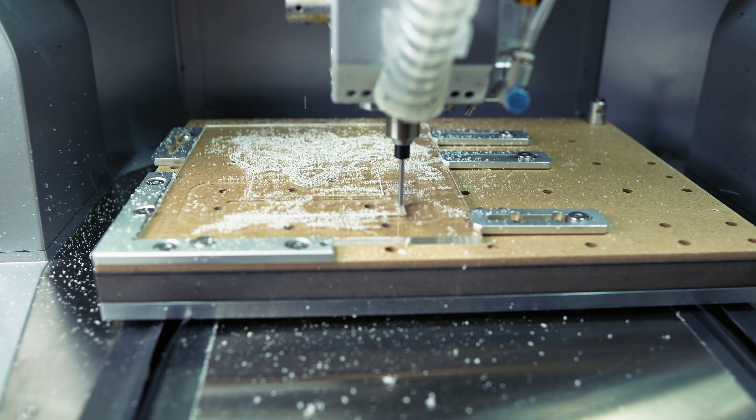Can a 3D printer create the same products as a CNC router, and is the quality just as good? My name is Mick. We're about to find out on the 3D Printing Zone.

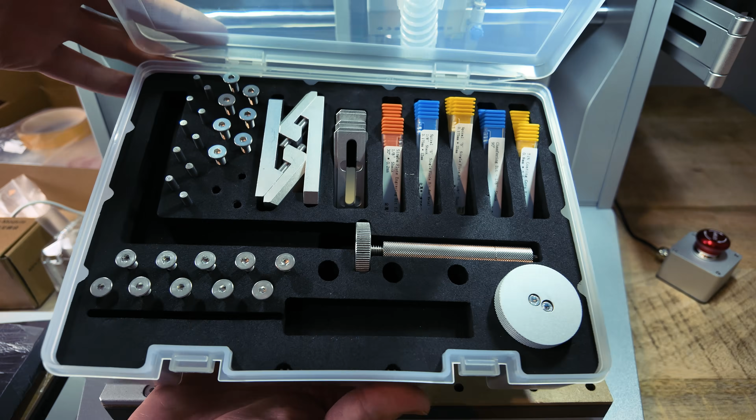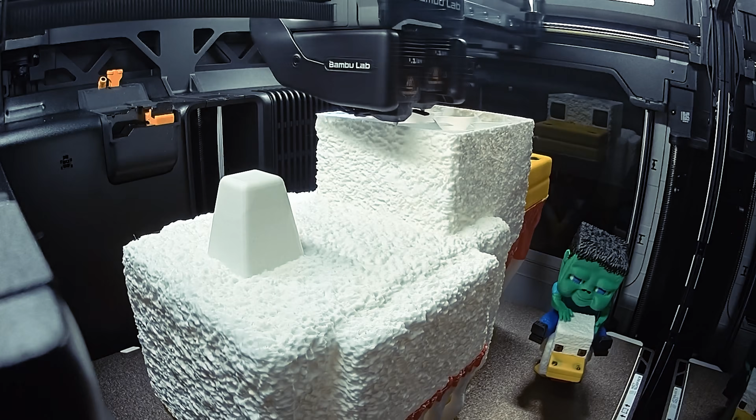I've been 3D printing since 2017 and have owned over 40 different printers. I just received my first CNC router, the Carvera Air from the company Makera. I've never used a CNC router before. In fact, it's kind of intimidating. It comes with a ton of drill bits and all these other parts that I don't really know what they do yet. That being said, a 3D printer and a CNC router use similar G code, and they both have an X, Y, and Z axis. So you think it would be similar, right?

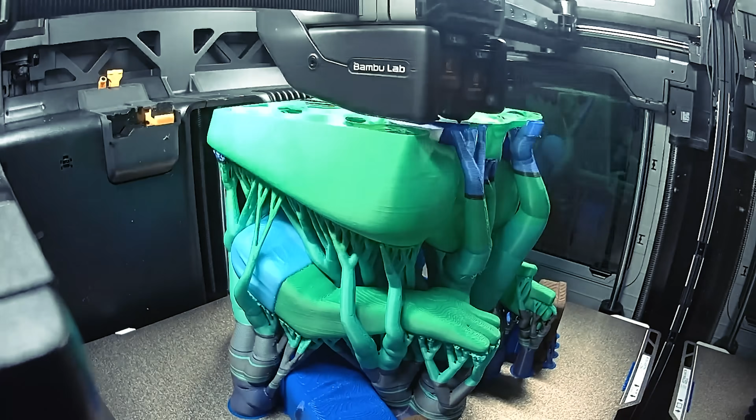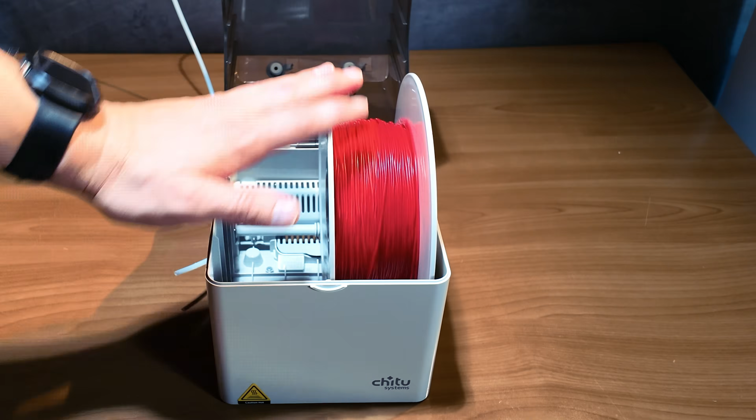Well, a 3D printer is additive, meaning it's adding to or building layer upon layer to create a part. A CNC router is the opposite. It is subtractive, where it is carving and subtracting material layer by layer. 3D printing is limited to the materials it can print, mainly different types of plastic, where a CNC router can carve plastic, metal, and a bunch of other materials. Let's get this thing unboxed, opened up, check out what it comes with, and try making something.

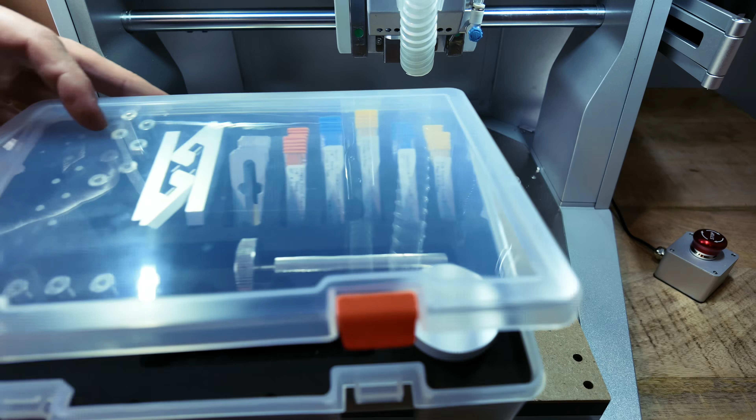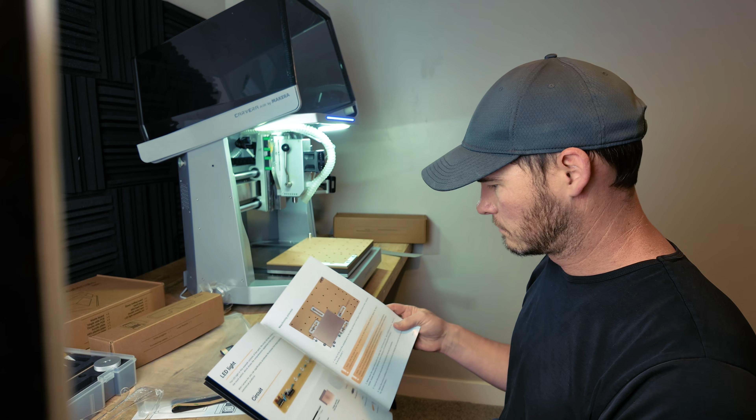Like I mentioned, this thing was intimidating at first. It comes with a ton of drill bits, other things I don't even know what their purpose is yet, and it even comes with a laser engraver. Despite being intimidated by the machine, once I opened the instructions, it gave me a clear view of what I needed to do from start to finish. Let's try making a light on the Carvera Air, then we'll try printing a similar light on a 3D printer and see how they compare.

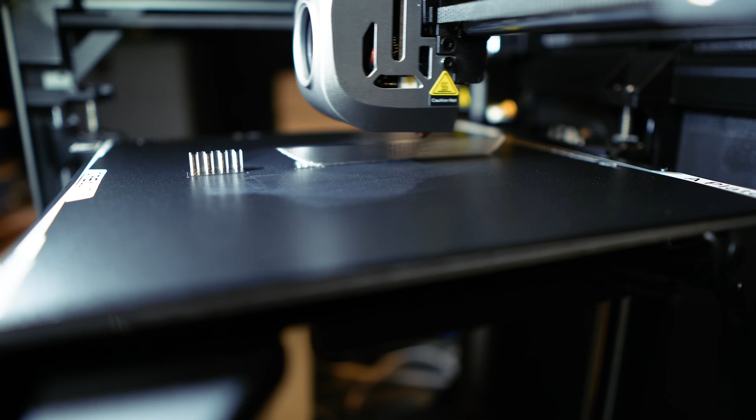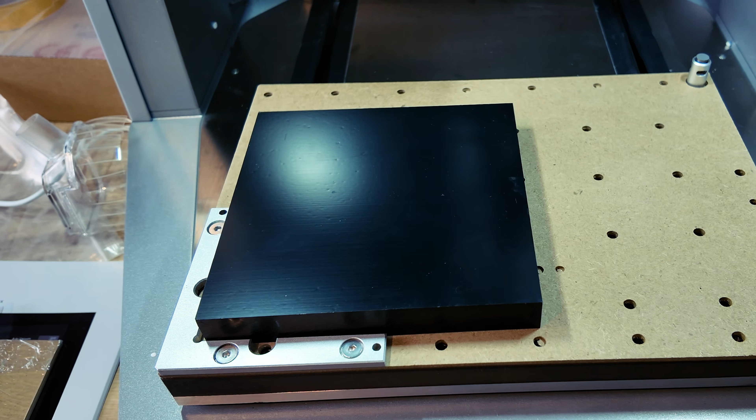I chose to use this light because it features clear acrylic, black acrylic, metal. It has a bunch of different materials so we can see how they all work together to build one piece. We'll start with this black acrylic block. And I keep saying acrylic, I think it actually might be ABS, but it's a very hard plastic. Unlike a 3D printer where it's additive and it's building layer by layer like we talked about before, this will be carving out the part, which means it needs to be stuck to the bed.

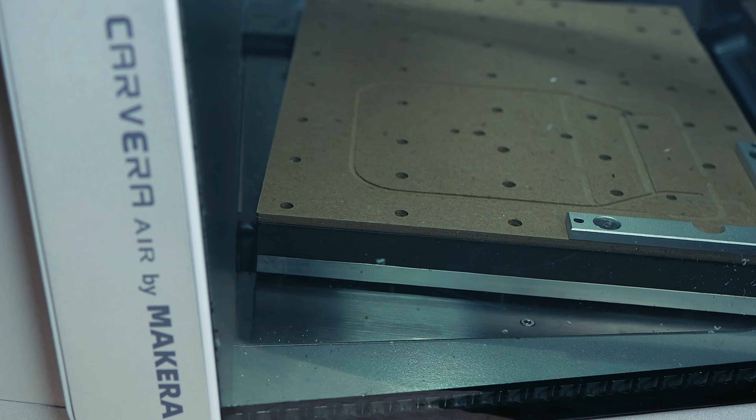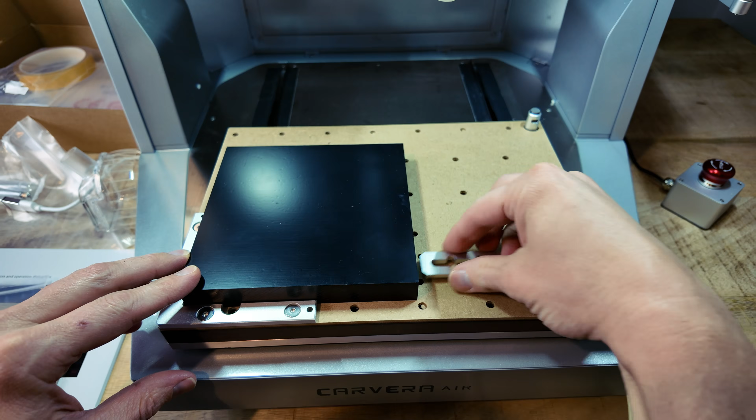There's a couple different ways you can do this. Some people will do the tape method where they put double-sided tape on the bottom. Others will do a tape method with the brackets. Today, I'm just doing the brackets where you put them on, you screw them tight, and that part will not move. Before the CNC router begins carving, it needs to level the bed. That's what we call it in 3D printing. It's really building out a mesh to see where the part is at and make sure it's level. To do this, it uses the laser on the right side.

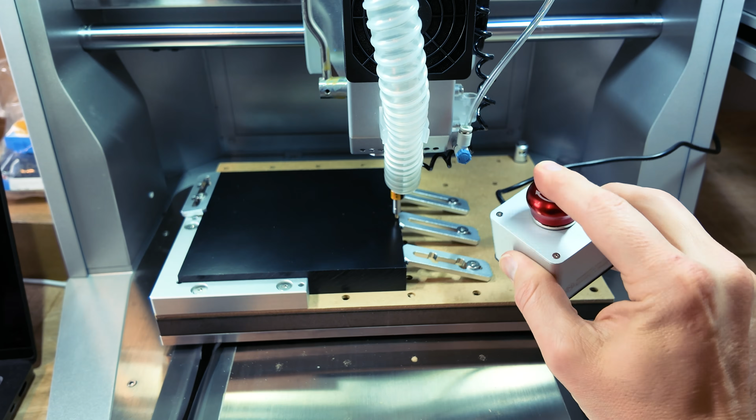Now, I almost broke the laser. When I put this in the software and I said, carve out the base for this light, I messed up, I didn't have the parameters right, and the laser almost hit this metal bracket. Luckily, it comes with an emergency stop switch. I hit that right before the laser broke, hitting that bracket, and we saved the laser sensor. This isn't the laser that engraves, it's the laser sensor that can detect how close it is to the bottom or to the part.

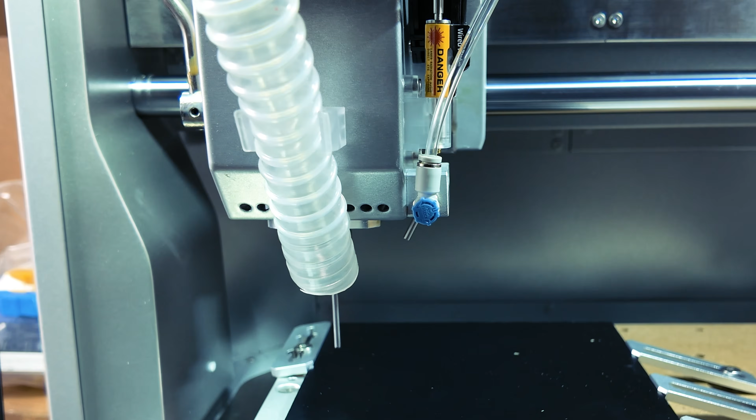This CNC router comes with a hose that can help suck up material as it's carving. I didn't hook up my shop vacuum or anything to the back. It would be nice if it had something included, and I believe they have other models that have an included vacuum. But for the purpose of this video, I left that vacuum off so that you can have a better view of what's actually being carved.

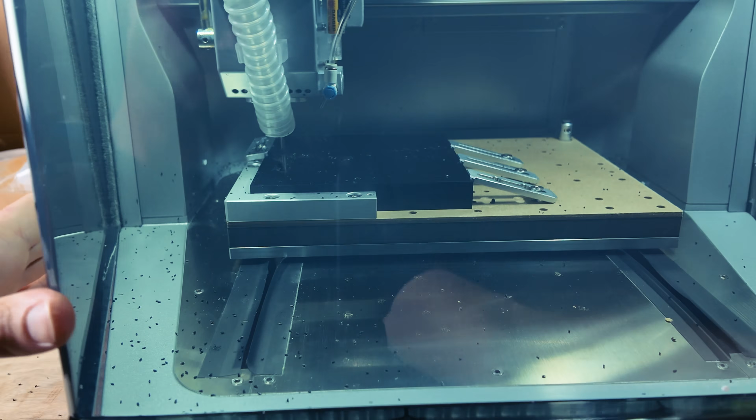When this thing started carving this black material, it started to make a mess. I had to close the front. Luckily, closing that contained all that material inside of the chamber. The G code for this file was already sent to us, so I haven't made any changes to it. When it's doing that last line of carving and cutting, it leaves these little tabs that you need to cut off at the very end.

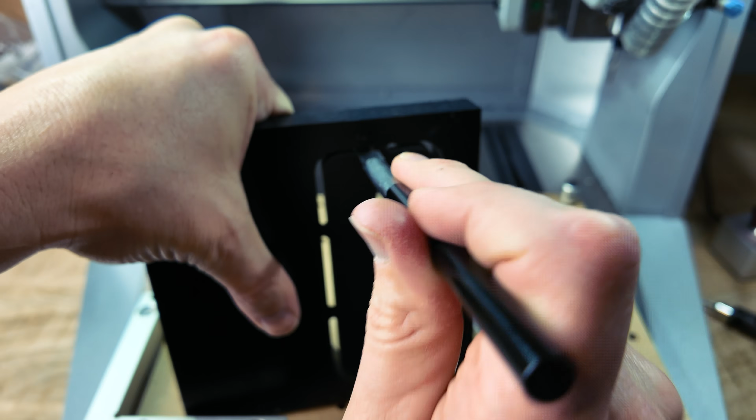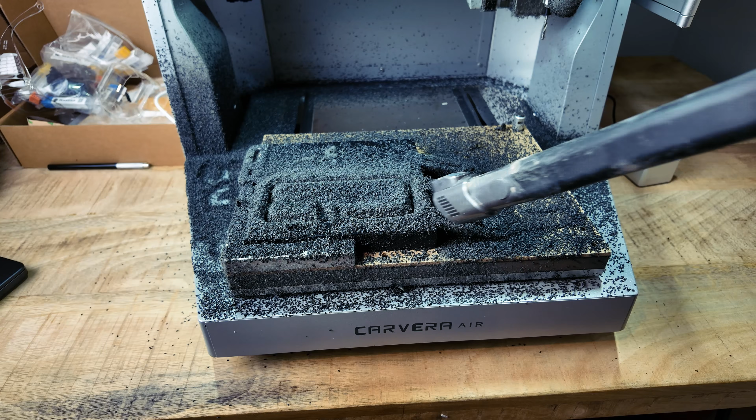Having those tabs there secures the part so that it's not moving around when it's trying to cut that last edge, and it's just a little small detail that you just clean up with the blade that they include. Once the part was finished, I opened this up and was able to vacuum everything out. It was actually kind of satisfying vacuuming up this material.

It had like a static feel where it was sticking to everything, so I really had to vacuum the whole chamber. The only area where material left the chamber was the two slots where the bed moves forward and backward. I don't know if you could really get around that. They have these rubber covers, but besides that, stuff's just gonna fall through there and it's not that hard to clean up.

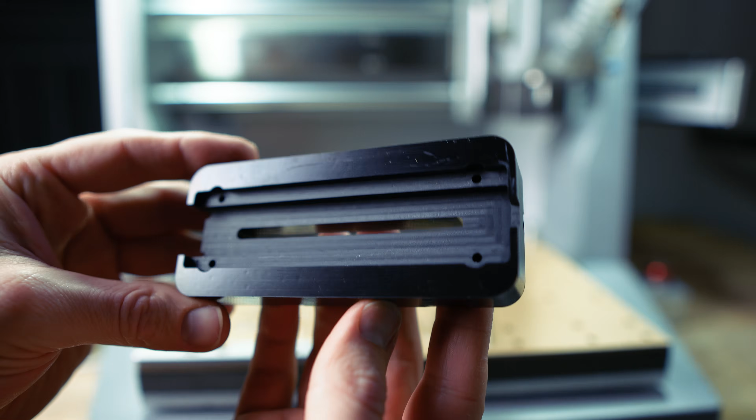This black base came out looking very clean. Let's see if it will fit the LED PCB board that came with the Carvera Air. That fits perfect. Let's move over to the aluminum piece. Just like the black base, I will secure this down with those same brackets.

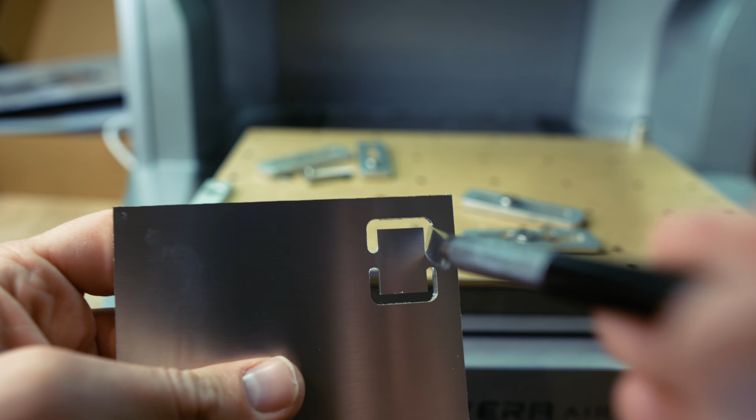I tried using the included blade to cut the aluminum part, but it was really difficult. Luckily, I have a battery-powered Dremel and it made it so much easier. I forgot to hit the record button when I cut this out of the bigger piece, but here's a clip of me just cleaning it up. By the way, don't do what I did. Make sure you have gloves or you're holding that with pliers. This could have easily slipped and cut me, and I already have so many cuts on my fingers.

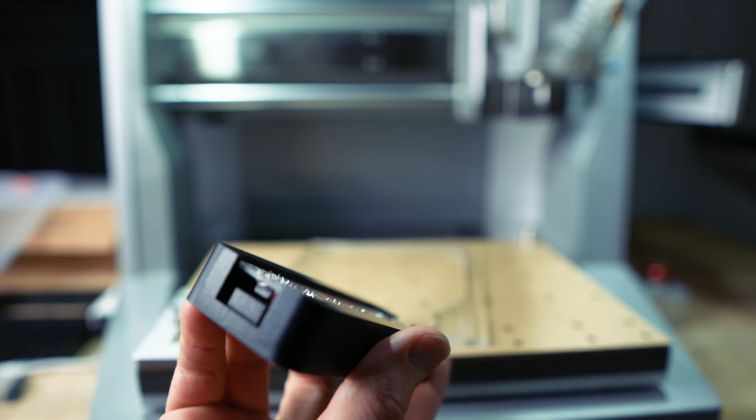You might be wondering, what is this aluminum piece for? Well, it goes right here on the bottom of the base, and it makes contact with the PCB board so that when I want to turn the light on or turn the light off, all I have to do is touch it with my finger. Touching it and holding down will dim it. Touching it again and holding it will make it go brighter. And then just touching it once will turn it on and off.

I didn't design this, I didn't code anything. This was already sent with the CNC router, but imagine the possibilities. This thing can also do PCB boards. I didn't do that today, but being able to do a PCB board, plastic, metal, all these different parts together in one piece, that is really impressive, and I don't think you could do that with a 3D printer. Now let's move to the clear acrylic and cut out that Spider-Man.

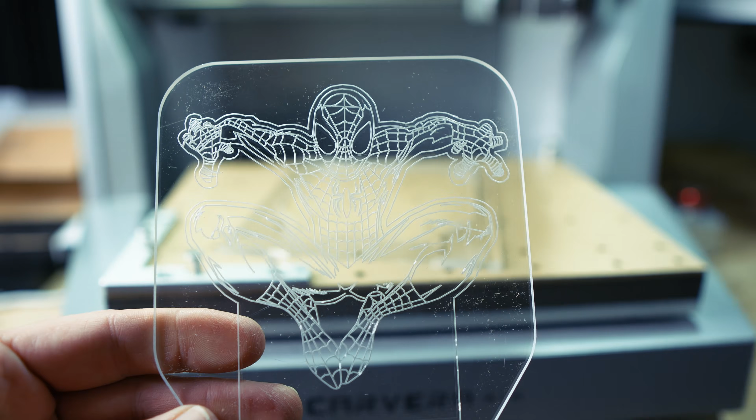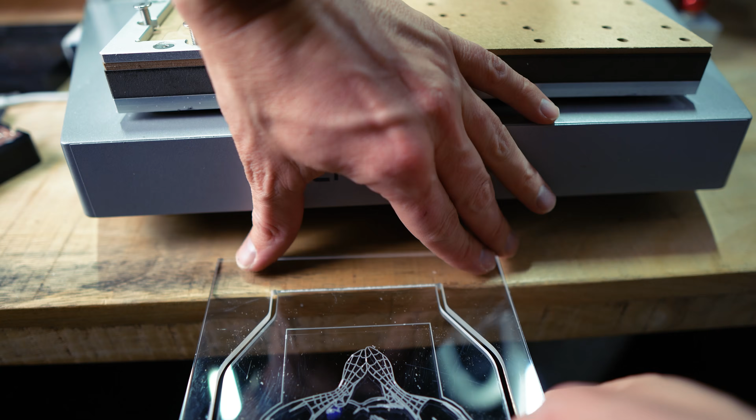This came out looking so good. It really looks like something you could buy on Etsy where you're getting a custom family image made. The nice thing about this part is I don't need to cut anything at all. Those little tabs don't exist. All I need to do is push this lightly to break it off. Okay, maybe not lightly. I had to push pretty hard, but it came out looking really great. Let's add it to the base and see how it looks all together with the light on.

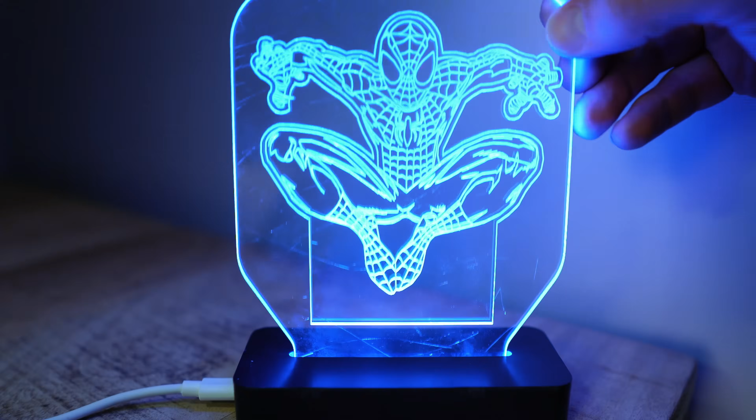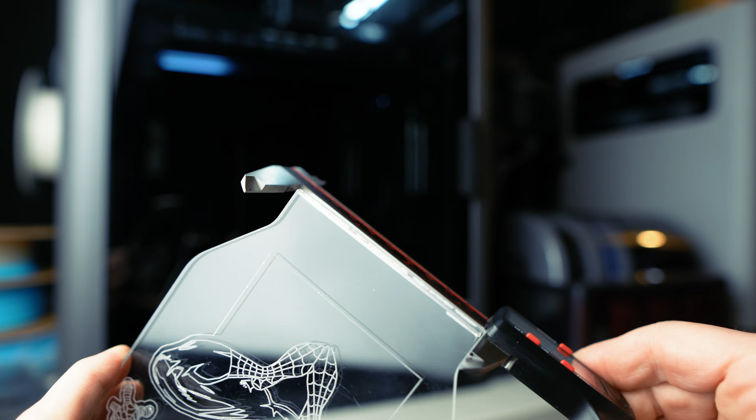This really looks so good. I love it, and it's just amazing that I was able to create this with one machine. Now the big question, can we recreate this clear piece on a 3D printer and have it look just as good? Let's go give it a try. The first thing I'll do is take some measurements. I want to make this as close to the same shape and size as the clear piece that we just cut on the Carvera Air.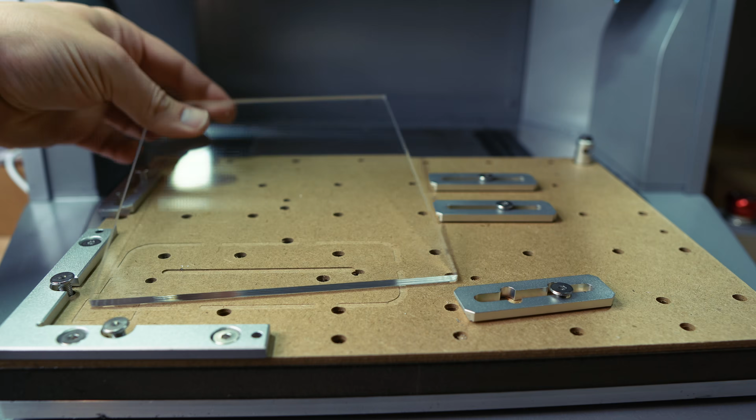I couldn't find the same exact spider design, so we're going to use this one instead. All right, let's send it to the printer. I'll be using this clear PLA to see if it can be as clear or close to as clear as the clear acrylic. This first layer came out looking really good. It pretty much looks like it's see-through or black actually, because it's just showing the color of the bed.

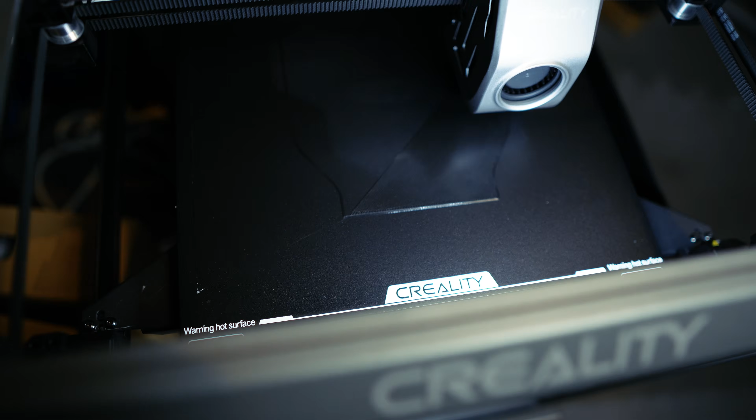While that's printing, everything I've made so far on the Carvera Air has been templates that they've created. What if I want to create my own model or create something that's unique to me, not something that they sent? Again, this is very intimidating.

I've never done anything like this before. That being said, they have tutorials for everything, including left clicking on the mouse, right clicking, how to navigate, how to rotate. Let's open up their software and I'll show you what I did to create this cool looking dragon.

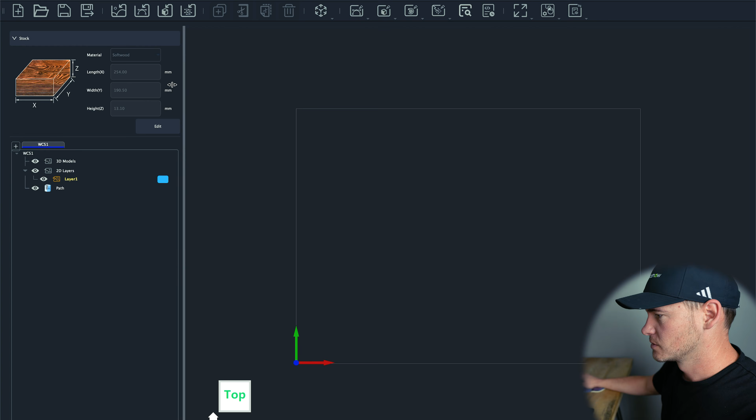When you open Makera Cam, it gives you the option to do a 3-axis or 4-axis design. I'll choose a 3-axis. And then the first thing you want to do before you start adding your model, at least to me, this is what I did, is to add the part you'll be cutting out, engraving, whatever it might be. So for me, over on the left side, I decided to use this piece of wood.

This is a softer material. It's really like MDF or sawdust glued together. So I don't know how well this will actually look. The length is 254 millimeters. I added the width and the height and hit OK. Now we have the build plate or the area we'll be carving.

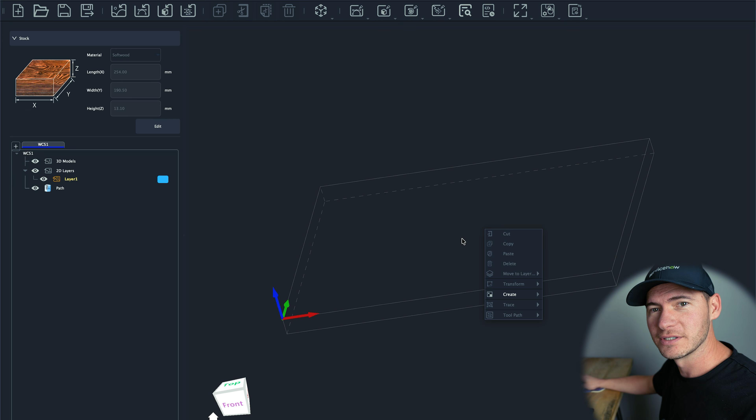Before I go any further, this is not like 3D printing software. It's not like a slicer. I don't right click to rotate. In fact, every time I right click, you can see it just pulls up this menu. In order to rotate, you have to hold shift and push down the little scroll bar on your mouse. If you don't have a scroll bar, you can come up here and click on rotate.

Then you can do left click. I had to do this the other day when I was using my computer without my mouse. I just had the pad and I had to rotate it this way. If I don't hold down shift and I click on the scroll, it allows me to pan it up, down, left, and right.

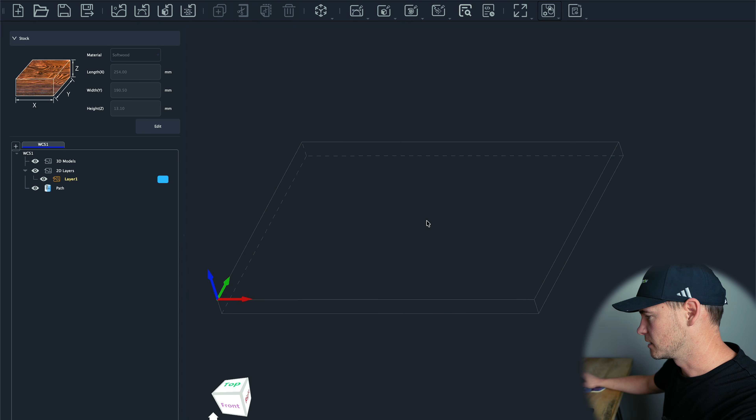Since I'm in the 3D printing world and I do a lot with STL files, let's add an STL dragon relief on here and see if we can carve that out. This software allows you to import 2D models, which is this button, or you can import 3D models, which is what I'll do. This is just a model I found online, but if I had something I designed that I wanted to do a relief of, I could throw that in here as well.

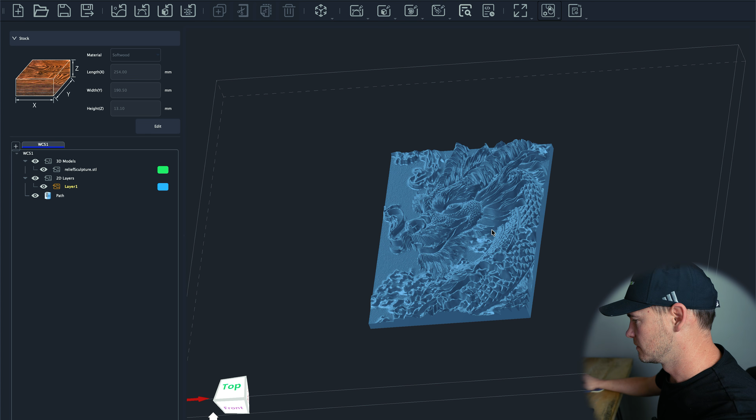Before I start assigning drill bits to this, I want to make sure it's the right shape and size and rotation. To do that, I select the model and go up and click on Adjust Object, and then we'll go to Transform, Move, Rotate, Scale. We'll make this 200 and rotate it 90 degrees.

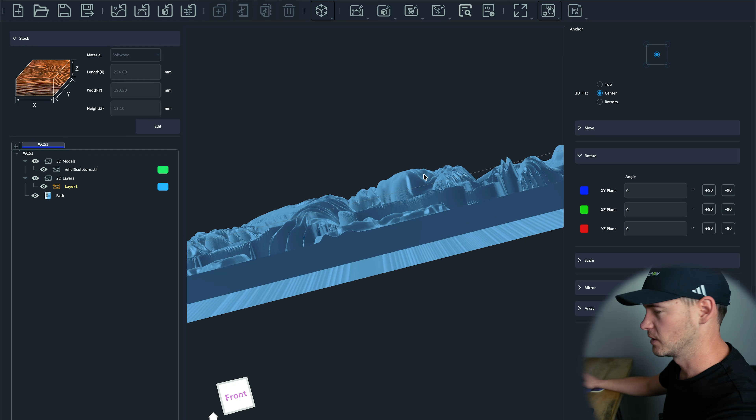When I look at it from this angle, I can see that it's actually too tall. It's too tall from the top and from the bottom. It won't be carved out. So let me actually shrink this down a little bit more just to make sure it fits within the parameters of that wood. This is the right size I want it, but it's still a little too tall, so we're going to shrink down just the height.

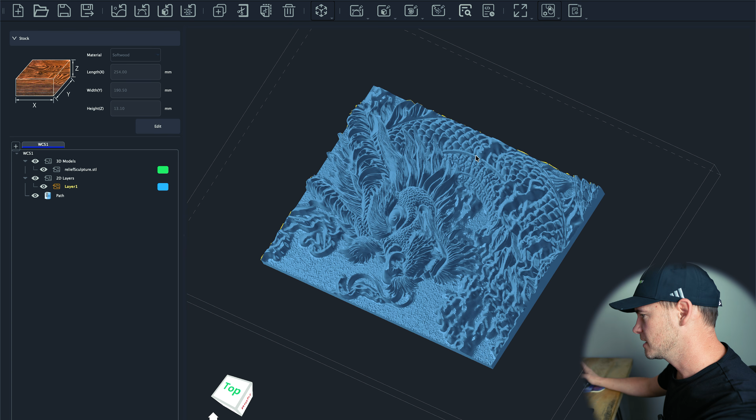Now that we have the correct shape and size, we need to assign the different drill bits and the paths it will take to make that relief carve. So to do that, you'll click on the part, and then we'll go up and do a 3D path. And this is going to be a 3D relief. Now you can do pockets, you can do contouring where you're cutting things out. I think we're just going to do the relief for now.

I could do a relief and then a contour and cut out this image, but I want it to be part of the whole board, so it looks like a big picture frame with this dragon inside. I'm going to add 3 different drill bits for this piece. I'll add a thicker bit to cut out the big areas, then I'll do a medium-sized bit, and then we'll finish it off with a really thin bit.

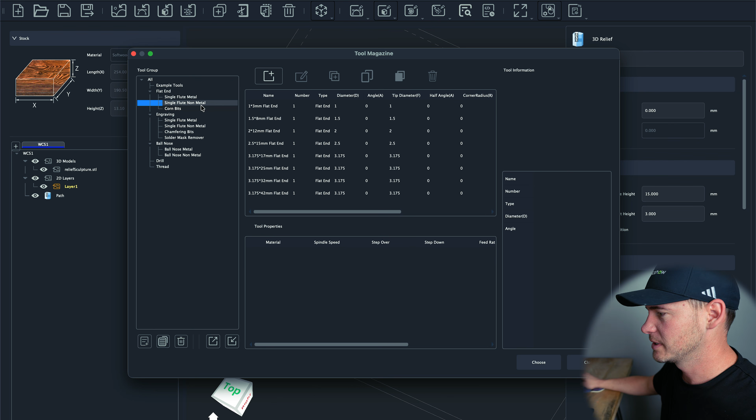This first one will be a single flute non-metal, and I happen to have the 25mm. When you look at this, it's kind of like with 3D printing. When you choose the type of material you want to use and the size of nozzle, the software will calculate everything else, the speeds it needs to take, looking at the material type.

Just like Bambu Lab does that with their printers, Creality does it too. Each of their software, each of their slicers will have those presets, and then you can modify it even further. Being an absolute beginner, I'm not going to modify any speeds.

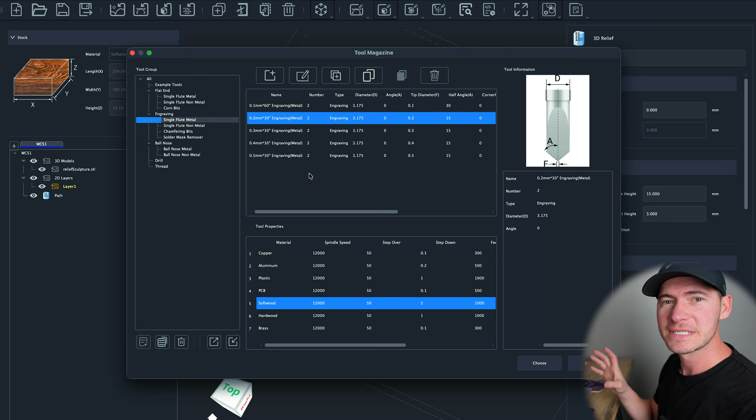I'm just going to go with the bits I've selected for the part I'm carving. For this last drill bit, I'm using a metal one because it goes down to 0.2mm. I don't have anything for wood that goes down that low. I'm pretty sure it's okay to use this for metal and wood, but we'll find out.

Now that I have the bits added, let's go ahead and click calculate and see what this looks like. Now that this is done, you can see all the different layers.

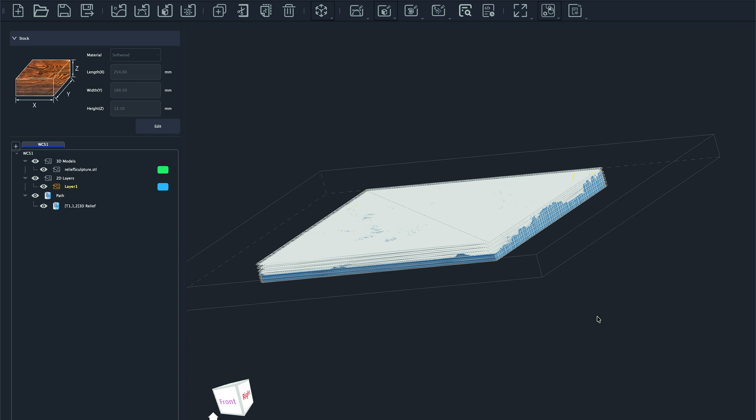The last thing you want to do before exporting this to G-code for the Carvera Air is to preview the part and make sure it's following the right path you want it to take. It's using the right drill bits and making sure it looks how you want it to look at the end. To preview the part, you just click on Preview Toolpaths.

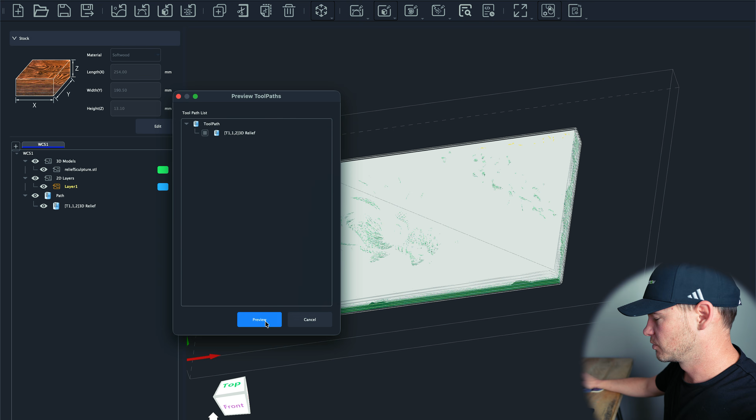I'll select the toolpaths we want to see and click Preview. From here, you can click the play button and watch it go layer by layer. This is very similar to the preview side with 3D printing.

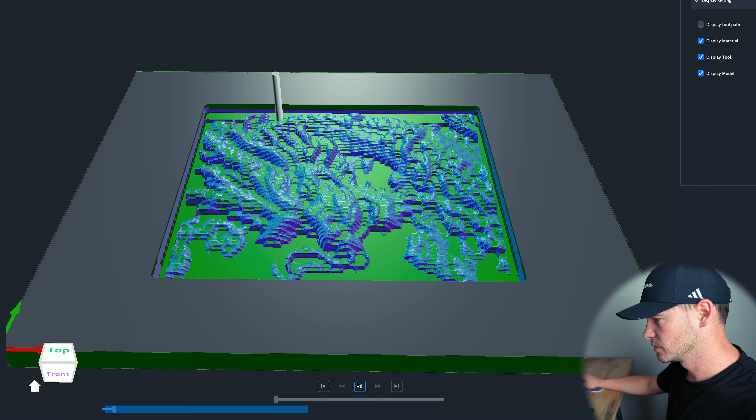If you look at this model with 3D printing, it shows you layer by layer going from the bottom to the top, every layer, and you can see how it's printing. This controller at the bottom allows you to change the speed, so we can watch it real time or speed it up. I'm not going to watch the whole thing, this looks good enough for now. Let's export it, send it to the Carvera Air, and start carving.

As this wood part is engraving, I have to say, relief engraving is so satisfying. You take a piece of wood, metal, brass, whatever it is, and you magically see this sculpture appear out of nowhere. It's pretty cool, kind of like 3D printing, just the opposite. 3D printing is additive, this is subtractive. It's taking away, but still creating a part.

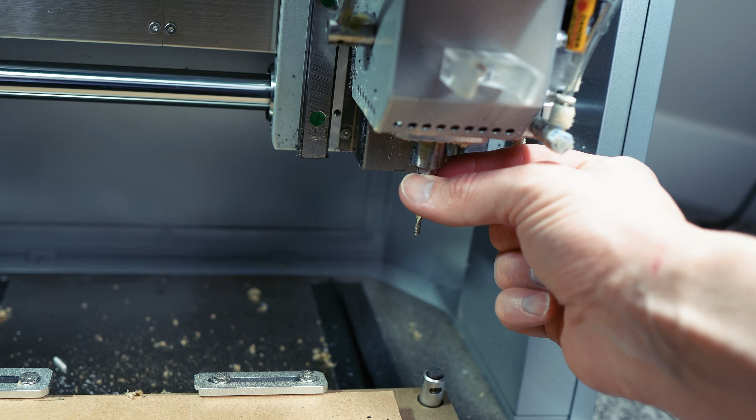The first bit on the dragon just finished. Now I'm going to switch it to the smaller one so we can get more detail, because this looks kind of weird right now.

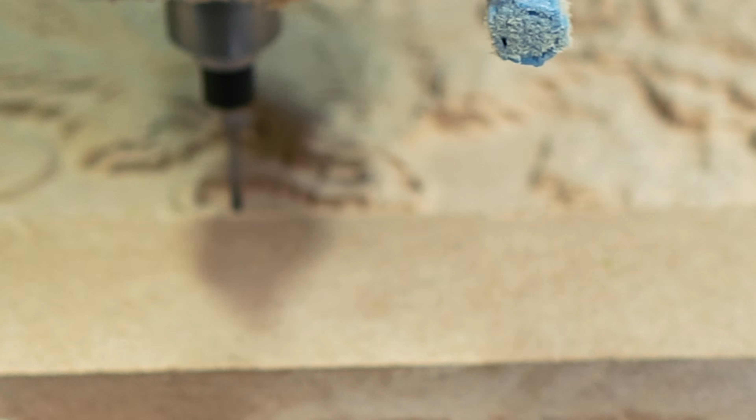Now I realized I made a mistake as this second bit is going. You'll notice it's just moving in the air. That's because I forgot to uncheck this box called step down. With the box checked, every layer this drill bit goes, it's going to go across the whole layer regardless of what it's actually carving.

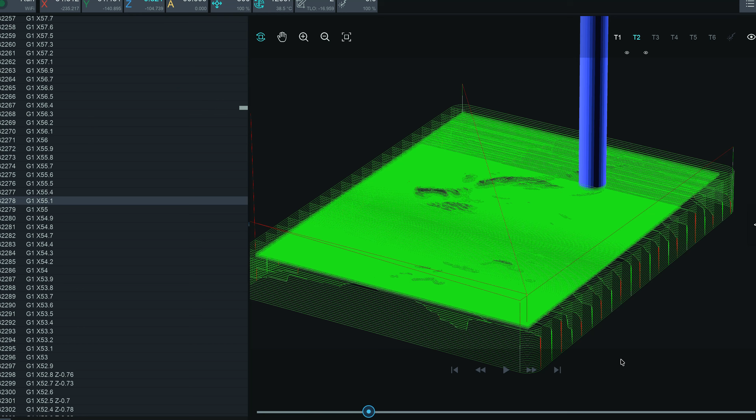So if it doesn't have to carve anything until the last part, which is how this dragon started, it's going to go all the way across back and forth, wasting time and electricity, doing nothing until it gets to that part. Then it will carve that part and continue going back and forth again. On the software, you can see all these lines it's going to take, the path regardless of actually carving anything.

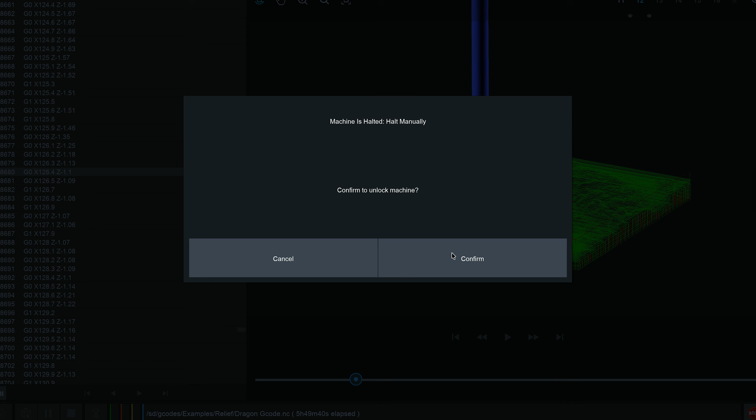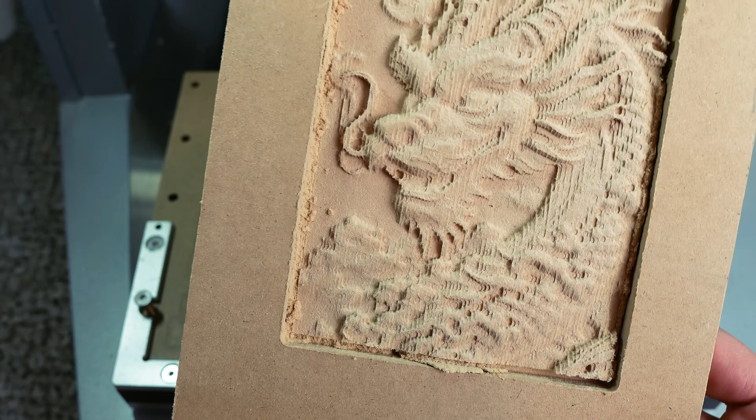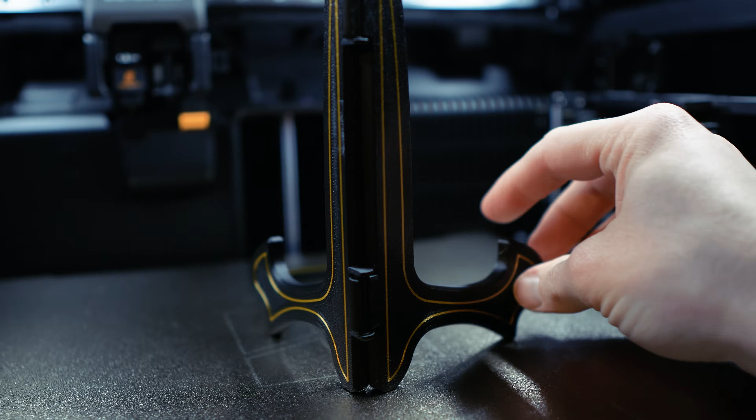Despite that, it still looks pretty cool. It almost looks like old art where it's not as high detail, more pixelated, so I can still put this on a picture frame. Here's one that I printed, and these go really well together. I want to try this again, but do it the right way, so let me do this on a smaller scale with metal and see how it looks.

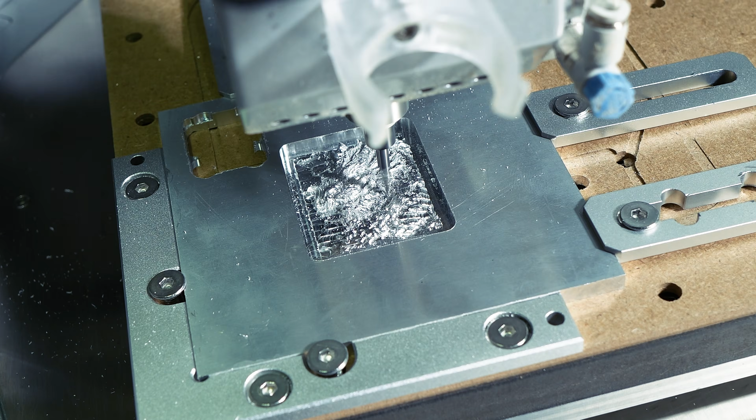While this is engraving, I need to be honest about something. When Makera reached out and asked us to make a video of a CNC router, we said we're a 3D printing channel, we don't do CNC routers. We do laser engraving occasionally, but we really want to focus on 3D printing. So we emailed them back and said, sorry, this isn't really what we do. They reached out again and again, and after 2 months of asking, we finally said yes, we'll do a video. Could be cool, we've never tried CNC routing before.

My intention was to get the CNC router, make this video, and then sell it. Sell it, make some money, and never do it again. But after this experience, after learning how to use their software and seeing how cool these parts look, I'm sold. I'm not gonna sell this anymore. I'm gonna keep it and continue making parts. You'll probably see this in other videos. I want to learn more about how I can combine this with 3D printing and maybe with laser engraving to create something even more powerful than just with one of those three.

The metal dragon just finished. Let's go check it out.

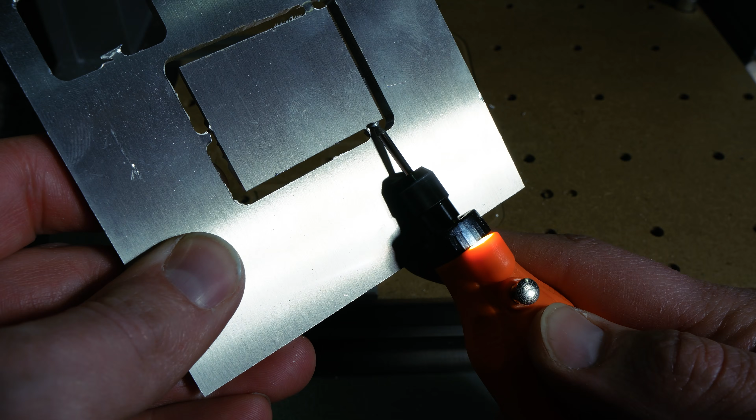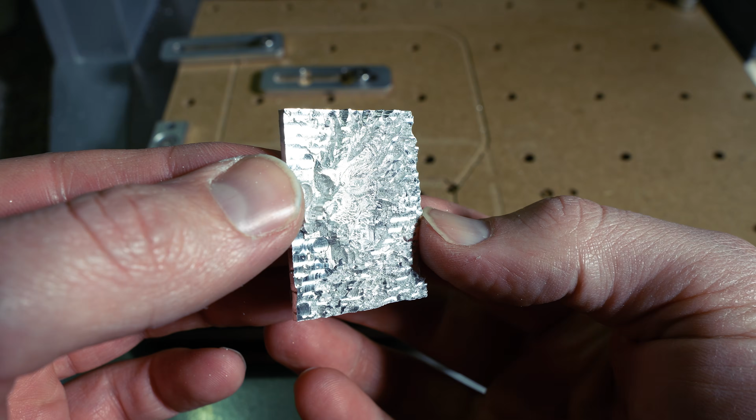The detail on this is so clear. This was with a 0.2 drill bit. I believe they even have 0.1 drill bits. I didn't have one in my stock, but that's finer detail than you can get with 3D printing. And this is metal, I can put this in my car, I can put this outside. There are some materials in 3D printing that can go in hot or cold places, but this is metal. I can make it out of wood. The possibilities are endless, and it's so exciting to have another tool where we can make things outside of 3D printing and laser engraving.

I think that print is almost done. Let's go check it out.

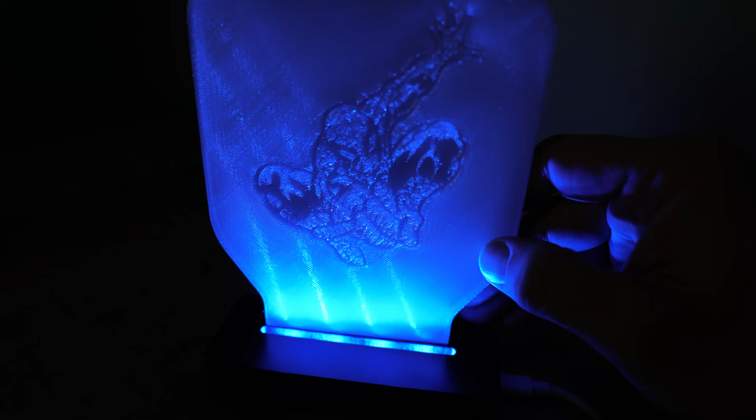Okay, this does not look clear at all. I think that's because I printed it flat with multiple layers and there's just air pockets. It just doesn't look as good. But let's see how it looks on the light. Yeah, just like I thought, that's not gonna pass.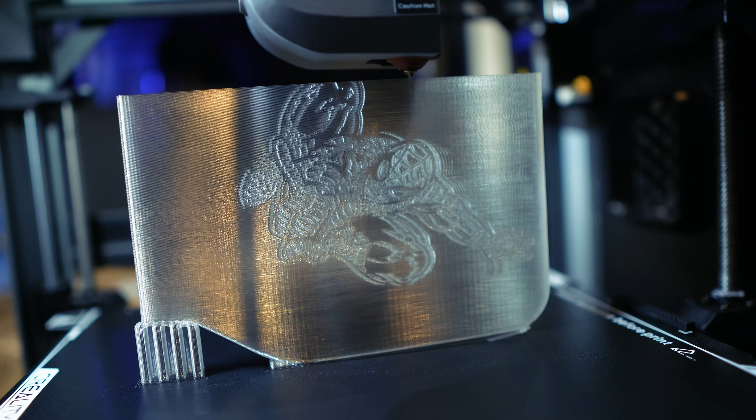Let's try something different, this time I'll try putting it on its side. We'll do just a 2 perimeter wall and 0 infill. I'm not sure how good the quality will be, but with only 2 layers, I'm hoping more light can pass through. I'm also putting it on its side so that the layer lines are the same direction as the light that's passing through. So when we stand it up and you have that light coming in, those lines will help complement the light and not go against it like we already saw with the flat piece.

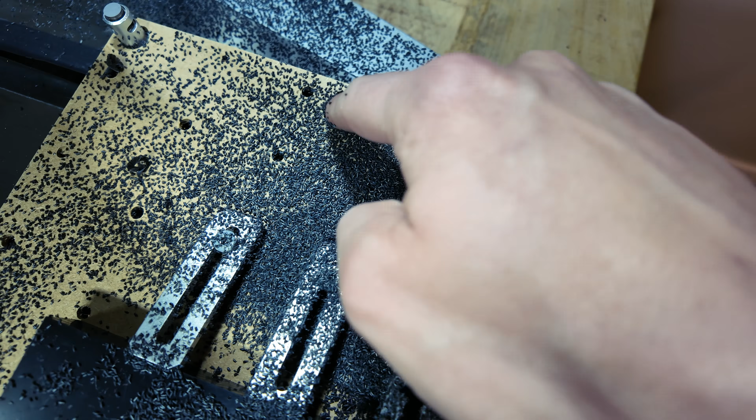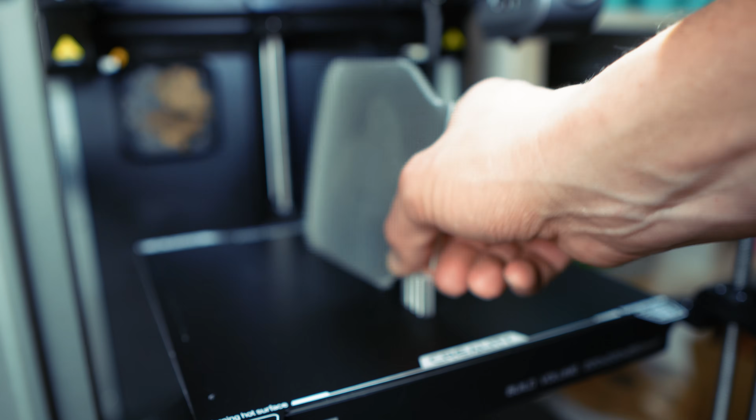The part just finished, let's go check it out. This looks a lot better. I don't know how it's gonna look on the light, but it's already more see-through and it looks more clear.

One thing to keep in mind, I printed this on a kid-friendly printer. This isn't the best quality printer that I own. Those are all busy printing stuff right now. We purchased every kid-friendly 3D printer on Amazon. We're making a complete video, so if you're in the market for a 3D printer that's user-friendly, kid-friendly, make sure to check back. Now let's go see how this looks on the light.

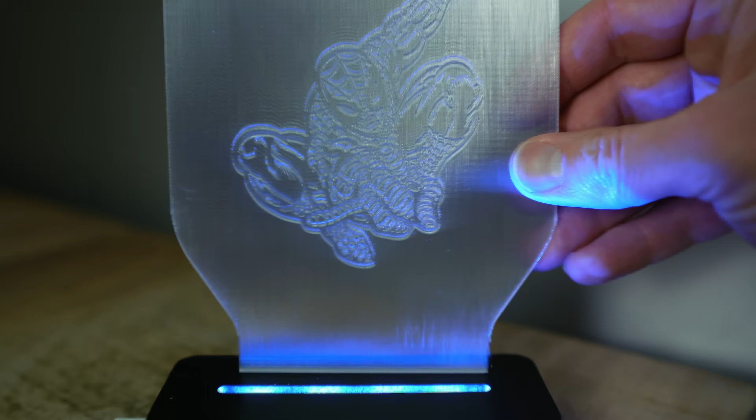That is not bad at all. In fact, that's something you might be able to sell. It looks different, it's not the exact same, the quality is not as good. CNC routers have their place, but I'm actually quite impressed. This thing has been a blast to work with. It's amazing all the different materials it can carve. It can take your small business to the next level or your hobby to the next level, being able to have so many different materials and make so many different things.